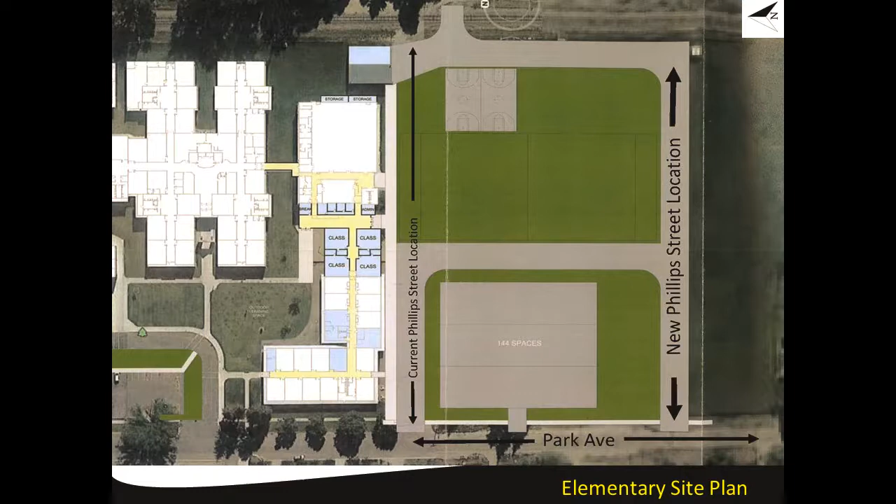The site plan for the safety entrance, classrooms, parking, and street location are outlined in this slide. This slide demonstrates how the front door of the K-3 school gives direct access to the building with little view from the office staff at the current time.

The special education classroom is out of space and uses temporary dividers to separate student instruction. The rooms have no space for wheelchairs and other required equipment. The K-3 exterior windows are aging and deteriorating.

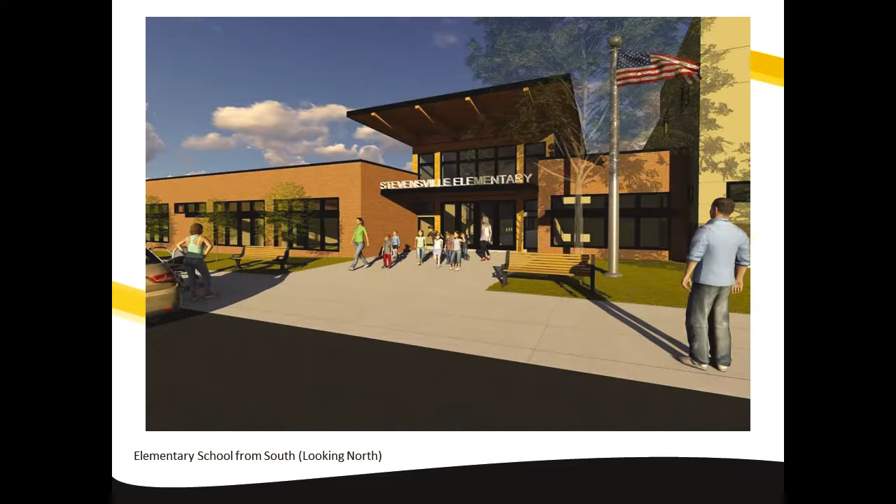The new entrance of the K-3 building would face south and view the playground and parking area. This would also connect students to the existing elementary gymnasium and music room.

The high school bond is proposed to address safety, classroom improvements, deferred maintenance, parking, restrooms, building access, and energy efficiency. Other needs include handicap accessibility and the renovation of the library, as well as other instructional spaces.

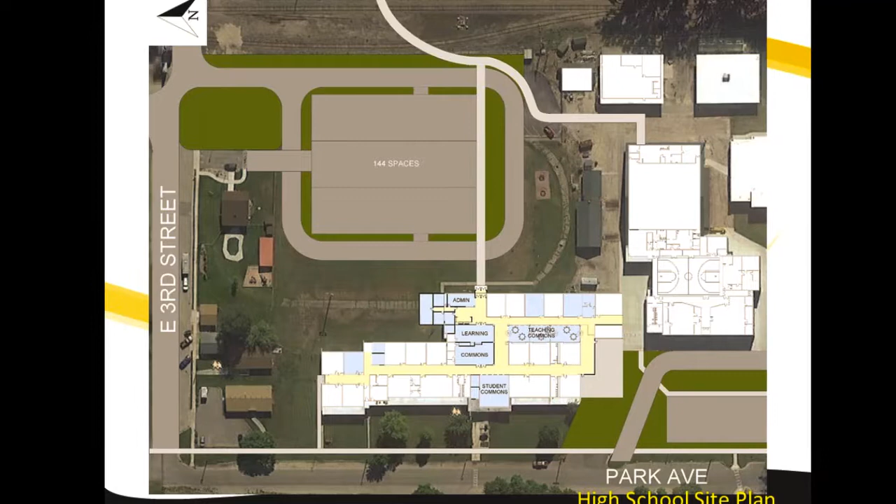The deferred maintenance of the high school will include the high school gym space, such as the locker rooms. This high school plan reflects a flip of the main entrance and parking to the east side of the building. The plan also reflects some of the interior renovation.

The high school entrance is difficult to monitor by office staff. The public enters the building before they can be seen or stopped for screening by the high school administrative staff. The high school was built in several phases. The following slides are a small depiction of some of the deferred maintenance issues.

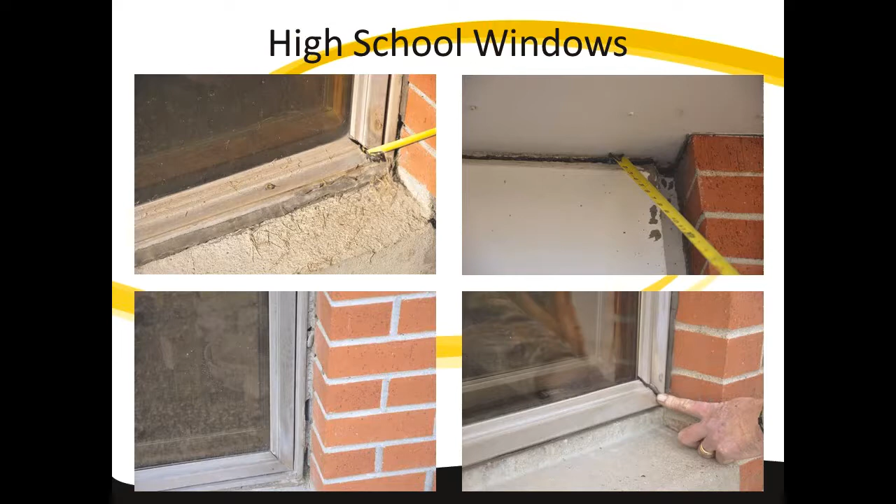This high school still uses a 1960s era boiler that is at the end of its life expectancy and is not as efficient as modern boilers.

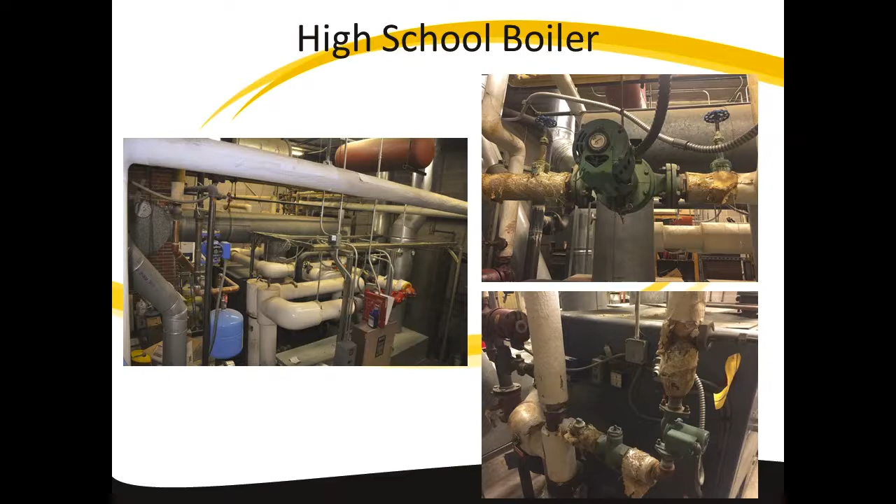High school restrooms are original fixtures that do not meet the Americans with Disabilities Act requirements. Wiring and retrofits for technology have been common since the original 1960 construction. These retrofits do not meet current standards and are difficult to repair.

In the agriculture building, our fire alarm and computer network wires come through conduit directly under a welding booth. Multiple other technology issues exist in this building as well as the industrial arts building.

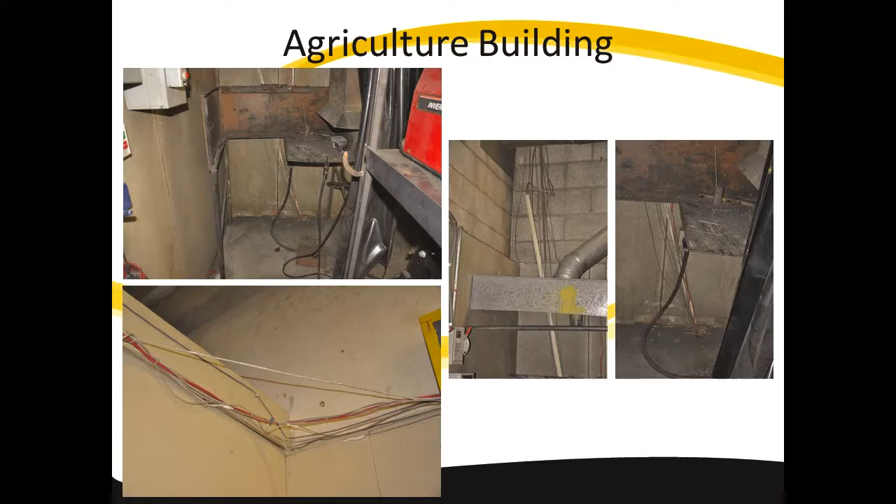The locker rooms in the main gym are undersized, lack ventilation, and lack adequate toilets for the size of the facility. Currently, there is one toilet and one urinal in the boys' locker room and two toilets in the girls' locker room.

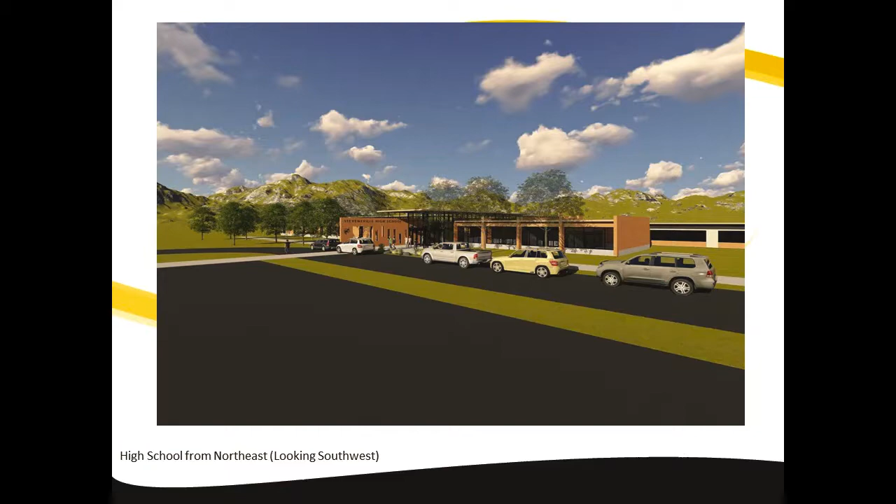The new entrance of the high school would be on the east side of the building and have sufficient parking for both school and athletic events. This parking would also serve the outdoor athletic fields.

The old entrance and office will be renovated into classrooms and common instructional space.

The elementary and high school bonds include shared costs. These costs include the move of the bus facility to accommodate the new elementary playground. The school maintenance department will move into the old bus facility.

Shared costs also include renovation, repair, and upgrade to the outdoor PE and athletic areas. These renovations include adding city water and sewer to a building to house concessions with restrooms and a team dressing area.

The current grandstands will also need to be replaced. These stands were acquired from the old Dornblaser Stadium 22 years ago, and engineers currently have expressed serious concerns regarding this structure.

The tennis courts also have serious deferred maintenance needs and have cracks throughout the playing surface that are several inches wide. Several courts are at the point of being unusable.

The track is also in need of major renovation. The current track is an English 440 distance dirt and cinder track. It is frequently muddy, soft, and unusable for PE and track when we receive moisture in the area. Currently, our track athletes are transported to a neighboring community to practice on an all-weather track.

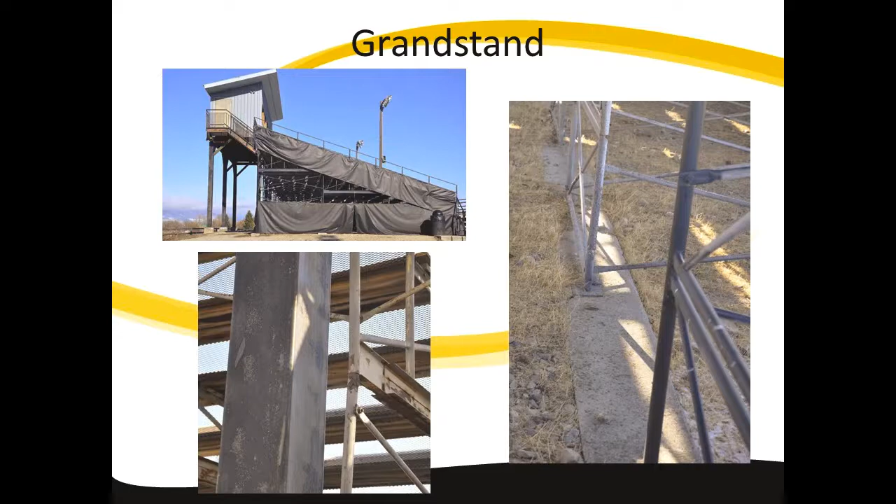You can find the market value of your property by visiting the school website at www.stevensvilleschools.org/2018-school-bond. This link will be shown on a subsequent slide.

If you would like more information, you can visit the school website. The site includes a link to the Ravalli County website to find your property taxable value and a calculator to assist you with individual cost calculations.

We are frequently asked, why bond now? In 2008, the Montana legislature commissioned a study of deferred maintenance on all Montana schools. While the study found in excess of $200 million in deferred maintenance throughout the entire state, little money has been made available by the legislature to address these issues.

Since that time, building costs have increased. As an example, the cost of replacement of the high school windows in 2008 was approximately $308,000. Calculated at a 3% inflation rate over 10 years, the cost of that same project today is approximately $414,000.